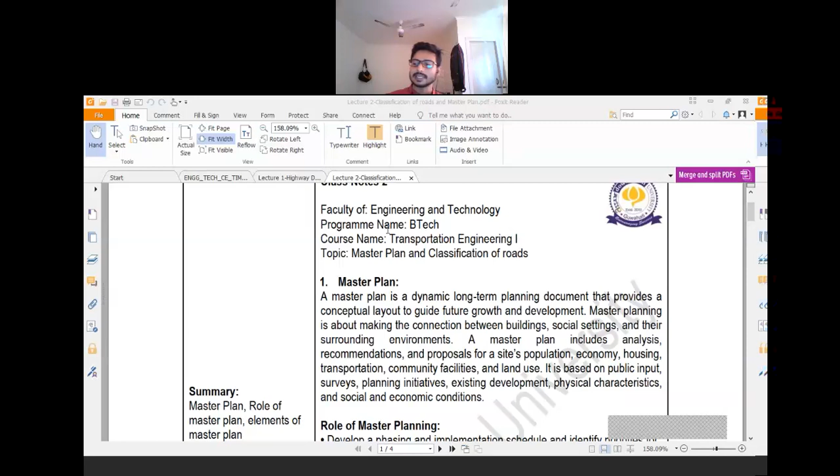Now, a master plan includes analysis, recommendation, and proposal for site population, economy, housing, transportation, community facilities, and land use. So basically, it comprises all the facilities around you. Now, it is based on public input. Different surveys are associated with the master plan and planning initiative, existing development, physical characteristics of the area, social and economic conditions.

The next is role of the master planning. Why is master planning important? Master planning is generally useful to develop a phasing and implementation schedule and identify priorities of action. As I said earlier, you first need to plan for 25 years. After that, based on the phasing or implementation, you will divide this master plan into short-term planning. Short-term planning is generally 5 years planning. So master plan is 25 years planning and short-term planning is 5 years planning. Based on the priority of your work, you will divide the master plan into short-term planning.

Act as a framework for regeneration, attract private sector investment, then conceptualize and shape the three-dimensional urban environment. Three-dimensional urban environment means you need to look at the development, the environmental condition, and the surrounding condition. Then define public, semi-private, and private spaces and public amenities. So you need to define where different portions of your city development will be situated.

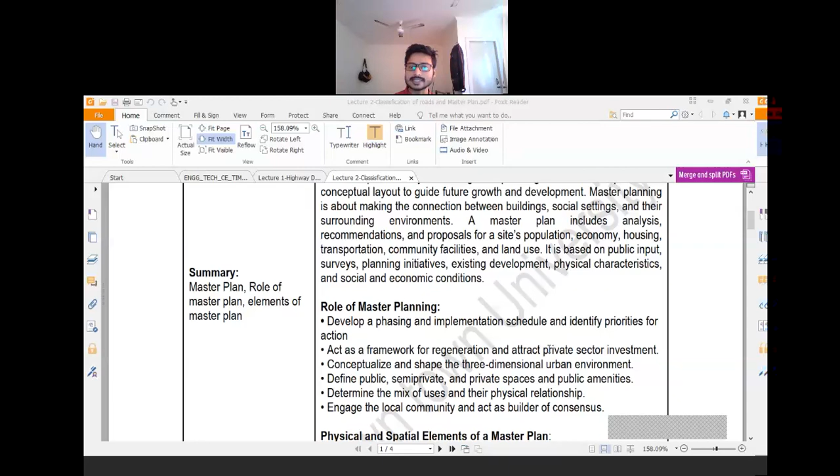Then another thing, suppose some business area is there and you have established some market area over there. Now in the market area, there will be different types of business models. Some will be bookstores, some will be food stores, etc. So you need to plan for this, where these food stores will be, where these bookstores will be, where this vegetable market will be. So all these things are taken care of by the master planning.

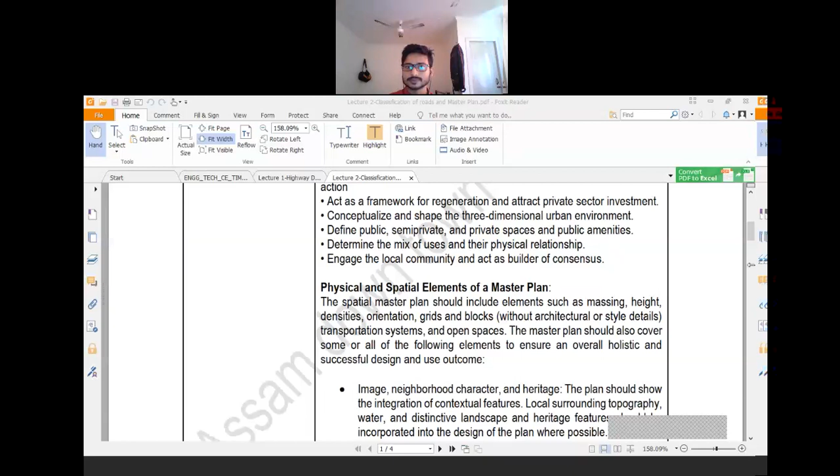Now, elements of the master plan. The master plan should include different elements, such as massing, height, densities, orientation, grid, and blocks. So, basically, these are different patterns of the master plan, and always we need to provide some open spaces in the city area. These open spaces are generally provided for meetings or for some recreational activities.

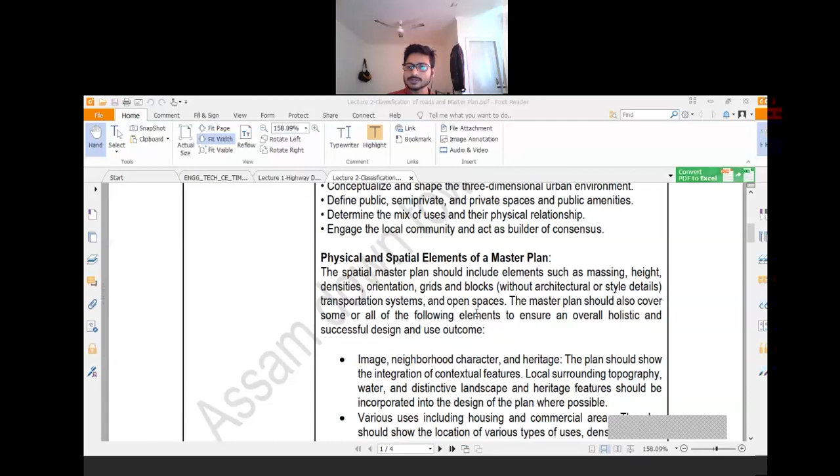Then the master plan should also cover some or all of the following elements. So these are the different elements. Let us discuss all these things. First one is image, neighborhood character, and heritage. Now, the plan should show the integration of contextual features; local surrounding topography, water, and distinctive landscape and heritage features should be incorporated into the design of the plan where it is possible.

Suppose in the area you are assigned to plan, some heritage building is there or some important landscape is there. So it is always advisable to keep all these heritage things or important landscape characteristics intact. Suppose one heritage building is there; in that case, you always have to plan in such a way that that heritage portion gets highlighted in your master plan. You cannot demolish these things.

So if you demolish those heritage places, or if you demolish some important landscape, in that case, the total area will be devoid of its original characteristic. So whenever you are going for a master plan, you always have to look for the local features which are available over there, and based on the local features and surroundings, you need to plan accordingly.

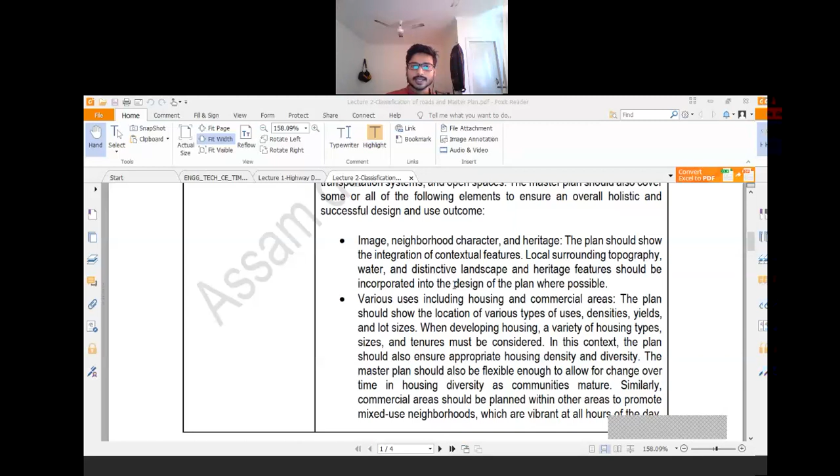Next one is various uses including housing and commercial areas. Now the plan should show the location of various types of uses, densities, yields and lot size. Various types of uses means which portion of your city area would be used for which activity. Some of the areas may be used for residential purposes, some for recreational purposes, some for industrial purposes, etc. You need to look for it.

Now, when developing housing, a variety of housing types, sizes, and tenures must be considered. So that is the thing which I have discussed, that there are different types of buildings, it may be 1 BHK, 2 BHK. So you need to consider all these factors accordingly. Now, in this context, the plan should also ensure appropriate housing density and diversity. The master plan should also be flexible enough to allow for change over time in housing diversity as the community matures. So this thing is very much important.

Because your master plan is basically a 25-year plan. So you have designed some area keeping in mind this 25-year plan. That is, in 25 years, there may be chances of future expansion. The population will become more mature, or there would be population growth. So in that case, your master plan should be flexible enough so that at any time you can incorporate some important feature.

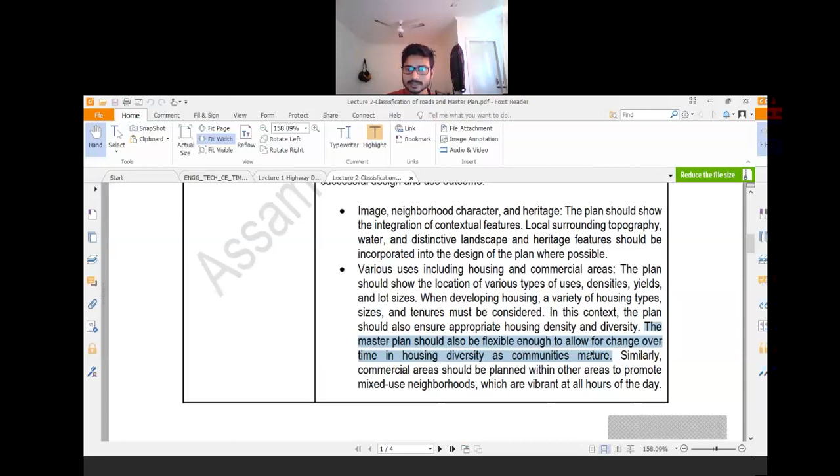Now, similarly, commercial areas, okay, this is discussed already. Now, entertainment and retail land uses should also be integrated in the master plan. There should be some places where some recreational activities are being promoted.

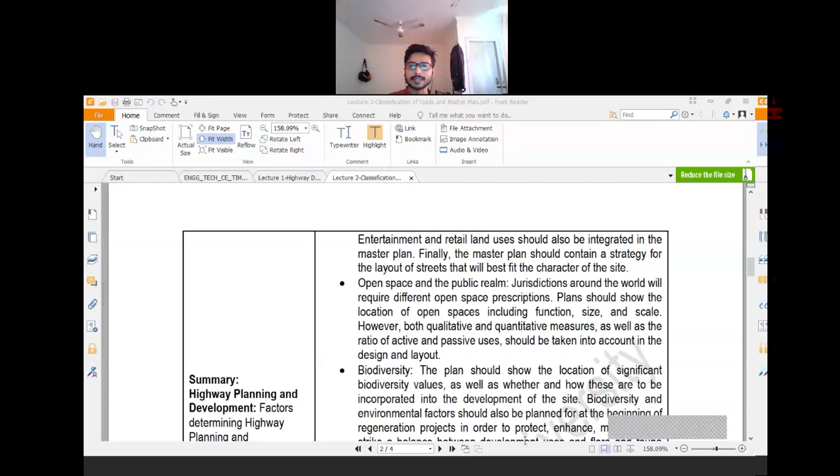Then open space and the public realm. Now, jurisdictions around the world will require different open space prescriptions. So, why is this open space required? Open space is required because of some recreational activities. If there are some meetings, it is required, as a playground, etc. So, for all these reasons, some open space is always required.

Now, plans should show the location of open spaces including function, size and scale. So there may be different types of open spaces, and these different open spaces would be designated as per their requirement. Okay, some of the open spaces may be used as a meeting place, some may be used as a playground, some may be used as a park.

Now, however, both qualitative and quantitative measures as well as the ratio of active and passive uses should be taken into account. Qualitative means what is the quality of that area, and quantitative means what are the numbers of that area. So that should be measured accordingly.

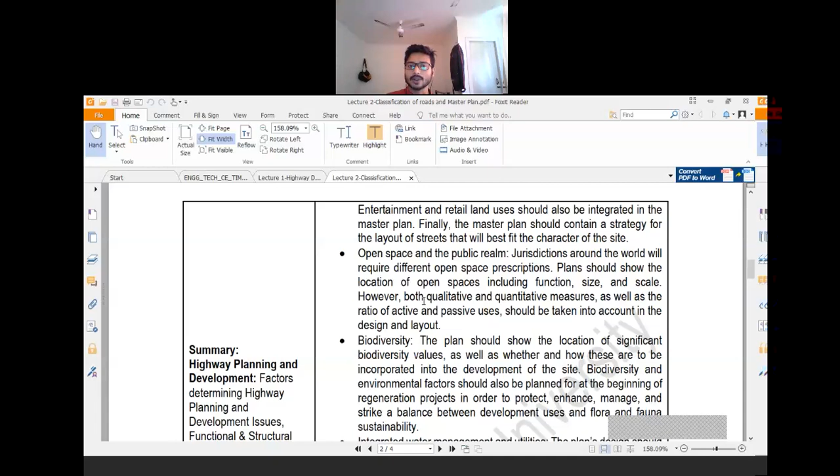Now, our next point is biodiversity. Now, the plan should show the location of significant biodiversity values as well as where and how these are to be incorporated into the development of the site. Like I said, open spaces are required. In some of the open spaces, you can design some biodiversity area, some biodiversity park or some vegetation park, etc. Along this some path would be there, so all the people can go over there and get relaxed from the busy nature of the city.

Now, biodiversity and environmental factors should also be planned for at the beginning of the regeneration project in order to protect, enhance, manage, and strike a balance between development use, flora, and fauna sustainability. So, basically, this biodiversity is... hello, hello.

So basically, this biodiversity is required to make the city more sustainable. Suppose the city area will always be very busy with road traffic, with different business areas, with your industry area, etc. So from this industry area, building area, business area, much more pollutant will be generated. So if there is some biodiversity, some vegetation over there, it will help to absorb all these pollutants and make your city clean and sustainable.

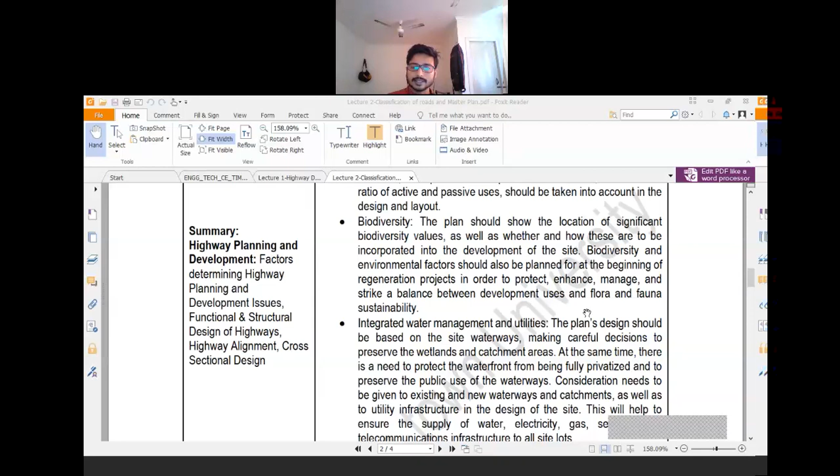Then integrated water management and utilities. This is very much important for any city to sustain. Water management is very much important, because water is required for each and every household. So whenever you are designing or going for the master plan, you need to look for the different water sources which would be useful for the city, because your city will require a huge amount of water for consumption, for industrial purposes, and for other purposes.

Now, the plan design should be based on the site waterways, making careful decisions to preserve the wetlands and catchment area. So basically, this water management is very much important, and that's why the important cities around us are generally constructed beside some river. Now, at the same time, there is a need to protect the waterfront from being fully privatized and to preserve the public use of the waterways. Suppose in your area or in your city, some wetlands, some ponds are there, some lakes are there.

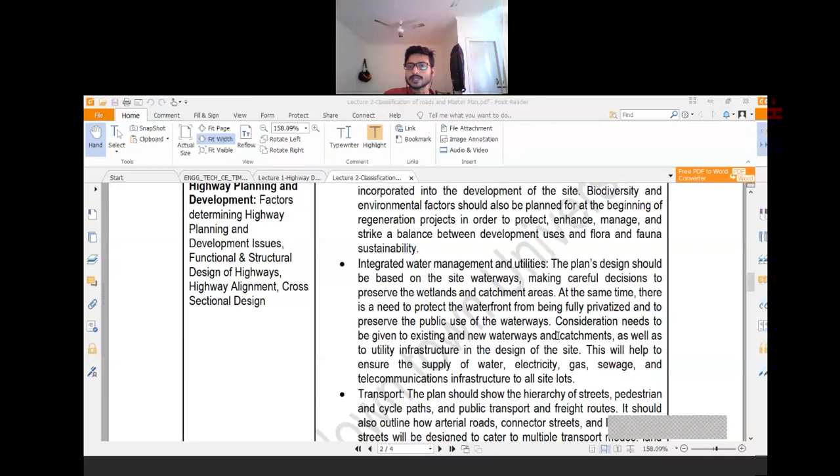Now, next thing is transport, and this is basically our main concern. So, you need to design the transport facilities as per the different land use pattern. Suppose in the residential area, if the population density is not too much high, in that case, your lane width can be narrower. Now, for the industrial area or for the business area, there would be much more population, there would be much more traffic. So in that case, your width of the road should be higher. Now the plan should show the hierarchy of streets, pedestrian and cycle paths if it is possible. Hierarchy of the roads means in urban roads there are different divisions of the road, like arterial, sub-arterial, major district road, minor district road, etc.

Now it should also outline how arterial roads, connector streets, and local access streets will be designed to cater to multiple transport modes. So generally for the city, roads are classified as arterial, sub-arterial, collector or connector streets and local access. So generally this local access will go up to your residence, then the local access road will meet with the collector streets, and the width of the collector street would be more than the local access road. Then the connector streets will meet with the arterial or sub-arterial road. Generally, arterial roads are the main road of any particular area. For example, for Guwahati, our arterial road is GS Road. Now, priority should be given to public transport, and walking and cycling should be encouraged throughout the layout of paths.

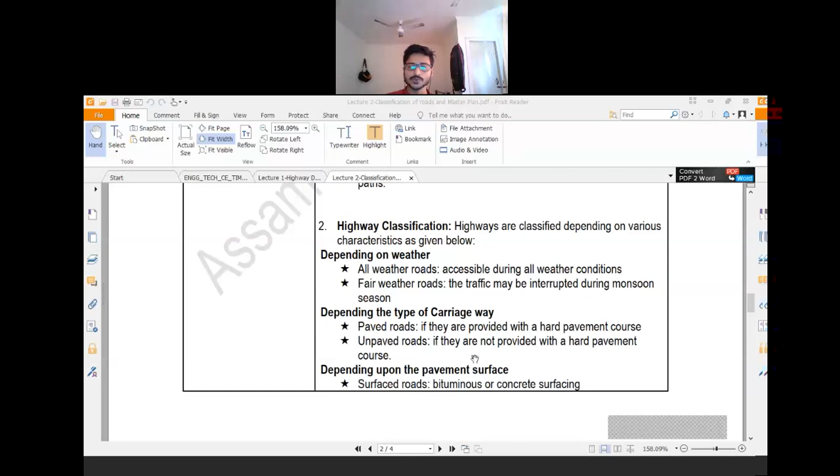They are not provided with any hard pavement course. Now the next one is depending upon the pavement surface. So here, basically...

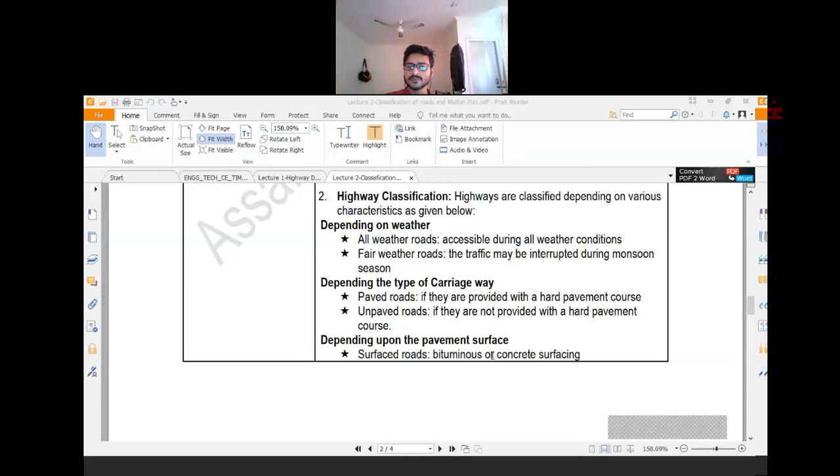This category is basically the expansion of the paved roads. In the paved roads, there are two types. One is based on the surface condition, so there may be surfaced roads, and these surface roads may have bituminous or concrete surfacing. Bituminous means which you have generally seen over the road, that is the black sticky portion. And concrete surfacing, you know what is concrete. So in some cases, concrete surfacing is also provided based on the traffic condition.

Another one is unsurfaced road. In the unsurfaced road, you will not provide any type of bitumen surfacing or cement concrete surfacing. That would be only waterbound macadam.

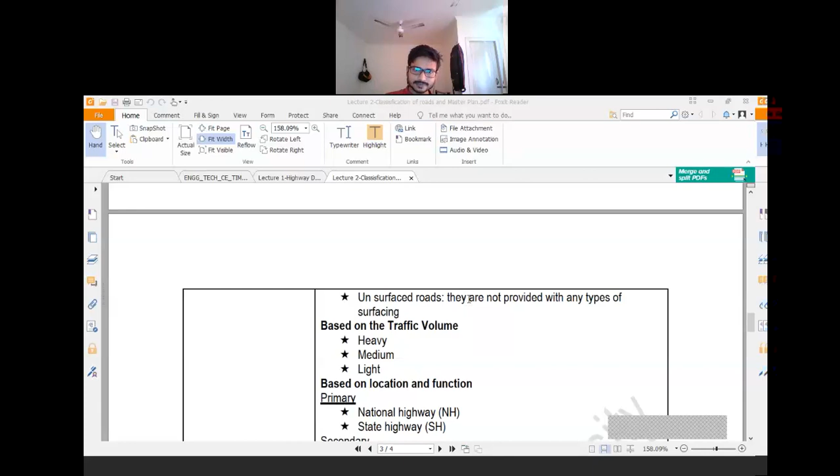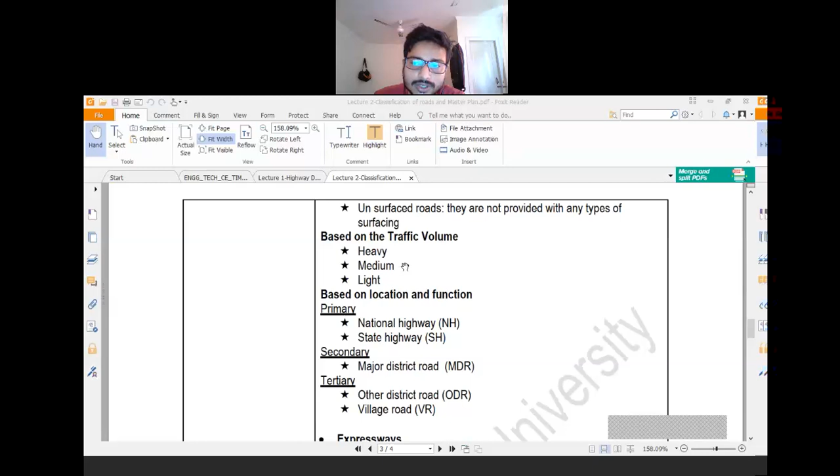Now coming to the next portion, based on the traffic volume. Your road may have a heavy traffic condition, a medium traffic condition, or a light traffic condition. So based on the traffic condition, you need to design your road.

Then based on location and function, there are different categories. In the primary category, you will get national highway and state highway. Then you will get major district road, other district road, and village road. So let us discuss about all these things.

So there are two terms which you need to understand: one is accessibility and another one is mobility. Accessibility means how easily you can access the road, and mobility means how much speed you can attain over there. Is it clear what is accessibility and what is mobility? So in that case, we can proceed further.

Is it clear what is accessibility and what is mobility? Okay, once again, accessibility means how easily you can access the road. Let me give one example. Suppose one road is there which passes in front of your home. Whenever you are getting out of your home, you can easily access that particular road. So this is accessibility, how easily you can get to the road. Now consider this condition.

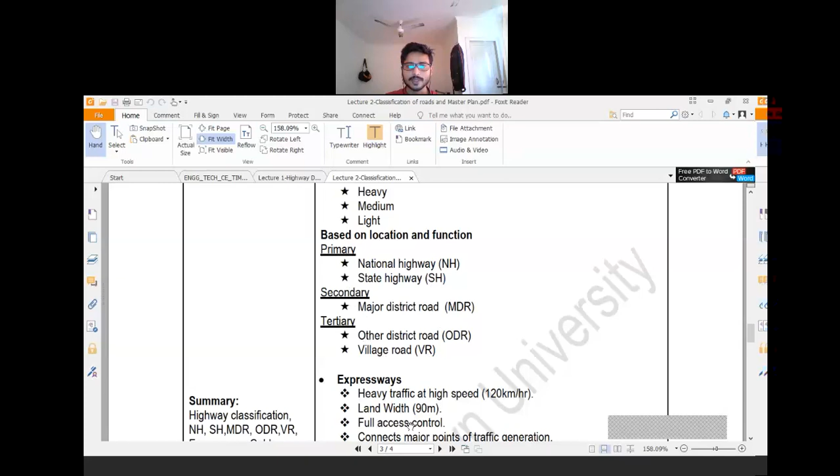Now, if we consider village roads, these are the roads which connect different villages or connect different houses of the villages. Generally, this village road would be an earthen road, but these village roads will go through or in front of your houses. So in that case, the accessibility of the village road would be very much high. But as these village roads are constructed with poor materials and generally these roads are earthen roads, mobility over the village road would be very much less.

Now this village road will connect to the other district road. Other district road generally connects different important portions of the village, and the other district road will connect to the major district road. Major district road is main important road in a district area which connects important business areas or important cities within a district.

Now if you go for the hierarchy, accessibility of the village road is maximum but mobility is minimum. Then you go for the other district road, accessibility is slightly reduced but mobility has slightly increased. Then if you go for the major district road, accessibility is again reduced but mobility again increased.

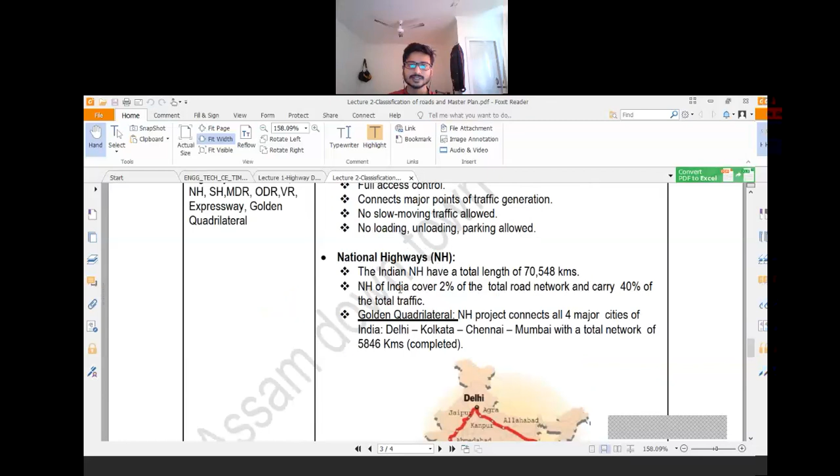So in the expressway, see the difference. Here mobility would be maximum because you can attain maximum speed over the expressway, but the accessibility of the expressway is very much reduced. Now another thing, national highway, we have already discussed about all these properties.

So another thing is the golden quadrilateral. Basically this is a national highway project that connects all four important cities, that is Delhi, Mumbai, Chennai and Kolkata. These are the metro cities, and this is a plan to connect all these cities so that business activities will be easy. Because if the road construction or connectivity is high, the chances of development would be more, because you can transport goods and other things more easily from one place to another.

So already the Delhi-Kolkata-Chennai-Mumbai road, 5,846 kilometers has been completed. Now some portion is left, so it will be completed within a few years.

Now coming to the description of these different roads, these things I have already discussed. State highways are the arterial roads of the state, meaning main roads of the state connecting up with the national highway. As discussed, this state highway will connect with the national highway, district headquarters and important cities within a state. So some important district headquarters will be connected with the state highway, and that state highway will be connected with the national highway.

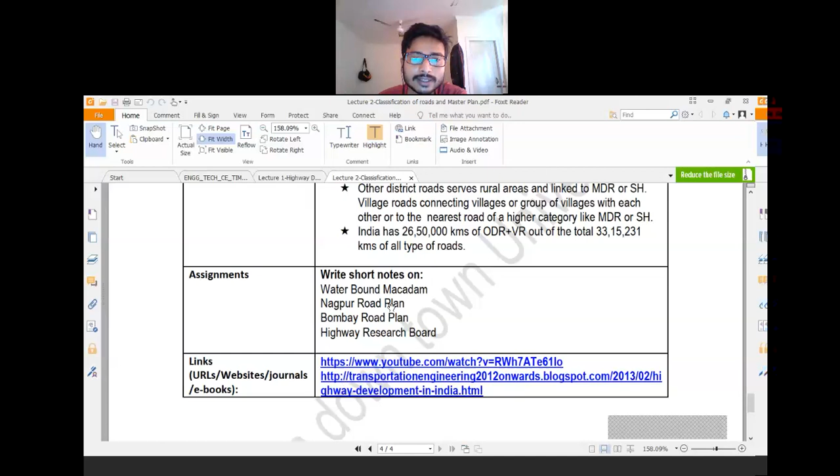So here are some links you can go over. In these links, some portions are discussed like water bound macadam, Nagpur road plan, Bombay road plan, Highway Research Board, etc. These are all theoretical things, so there is nothing much to discuss, that's why I'm not discussing this. You can look at the link and go through all this material.